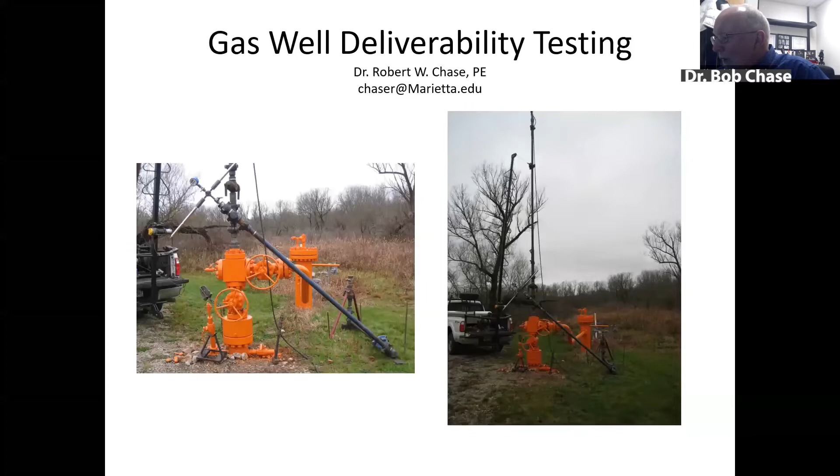Today I'm going to be talking about gas well deliverability testing, but I wanted to start out and demonstrate how much we have more in common with each other than you might imagine.

I just recently had my DNA analyzed by Ancestry.com, and I think you'll all find this interesting. Obviously, I'm very fair-skinned, and Ancestry.com provided a DNA analysis for me. They found that my DNA was primarily Germanic Europe, 18% from England and Northwestern Europe, 7% Irish in my background, 5% Norwegian, so I have a little Viking influence. Interestingly enough, 2% Nigerian, and this next one is what brings us all together. In my background, somewhere, someone along the trade routes back in ancient times must have visited Germanic Europe, and consequently I have 1% Middle East in my background.

So I say to all of you, salam alaikum, and hope you all have a great day and enjoy the presentation. Okay, so let's dispense with humorous information and talk about well testing.

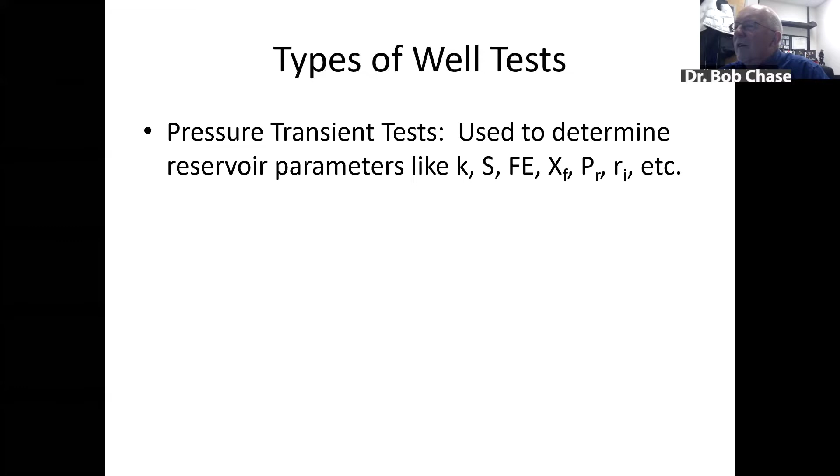You're probably all familiar with pressure transient analysis, and I want to distinguish that from deliverability testing, because pressure transient analysis we use primarily to determine the parameters you see on the screen: permeability, skin factor, flow efficiency, fracture half length, average reservoir pressure, radius of investigation, etc.

Deliverability testing, on the other hand, is what we use to predict the inflow performance of gas wells. Now, you may be more familiar with predicting inflow performance of oil wells. I'm sure many of you have studied about predicting IPRs for oil wells.

Using Vogel's method. And what you should remember from that process is that to predict the inflow performance for an oil well, you really only need one flow test, a stabilized value of flow rate until your bottom hole pressure stabilizes at a PWF. And then you also need your average reservoir pressure. With that basic information, you're able to predict the inflow performance of an oil well.

On the other hand, gas wells are very different. And the biggest difference between working with gas and working with oil, of course, is turbulence. Turbulence is a big factor in the well testing process. And because of turbulence, or non-Darcy flow, we're not able to predict the inflow performance of a gas well using just one flow test. That's what we're going to focus on and learn about today.

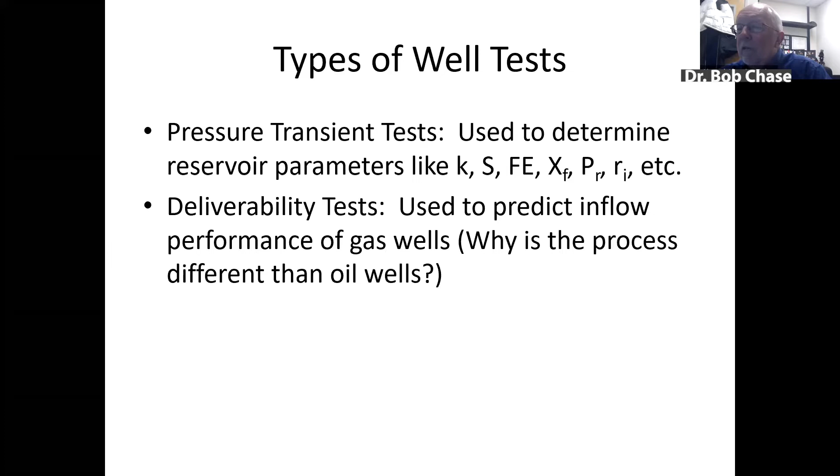So let's talk a little bit about the goals of deliverability testing. The first goal is that we want to be able to predict the inflow performance of our gas well.

A term that we use a lot in the United States and in Canada in particular is absolute open flow, or AOF, of our gas well. The absolute open flow of a gas well is the flow rate that a well will produce against a zero sand face back pressure, in other words, a flowing bottom hole pressure of zero.

So when you relate this type of testing to oil well testing, we're really talking about our maximum gas flow rate, QG max. That would be the equivalent of our maximum oil flow rate in an oil inflow performance test.

In addition to predicting the current inflow performance curve for a gas well, we would also like to be able to predict future IPRs. As you all probably are familiar with the process of nodal analysis, we like to be able to predict the future as well as the current. So future IPR curves are very important, and we'll see how we can do that.

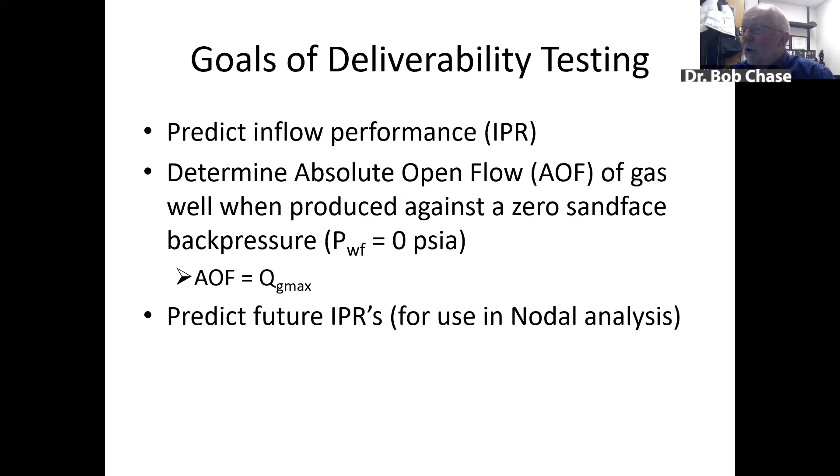Okay, a little bit on the history of deliverability testing. The groundwork for predicting gas well deliverability was done by two researchers with the United States Bureau of Mines. Interestingly, in the early days of the oil industry in the United States, the primary regulatory body that oversaw the oil and gas industry was the United States Bureau of Mines. It later became, I believe, the Department of Interior.

Two researchers, Pierce and Rawlins, did early work in 1929. Then Rawlins and another gentleman named Schellhardt published a monograph in 1936 called Back Pressure Data on Natural Gas Wells. In that publication, they laid the groundwork for what we call 4-point testing, deliverability testing.

Now, the wells that Rawlins and Schellhardt studied and worked on were all very good gas wells and produced at high rates. The rock had good permeability.

In the 1950s, 1955, a gentleman named Cullender published another landmark publication, the Isochronal Performance Method of Determining the Flow Characteristics of Gas Wells. He looked at wells that did not stabilize as quickly as the wells Rawlins and Schellhardt looked at.

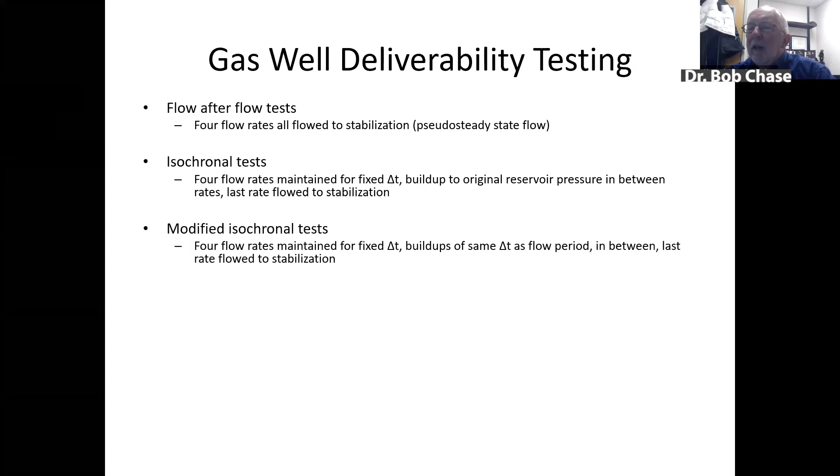That was further modified by Katz, as I mentioned, and he developed the modified isochronal test, where flow rates are maintained for a fixed period of time, delta T, and the buildups in between are maintained for that same exact delta T as the flow period. Then finally, the last rate is flowed to stabilization. We'll look at some examples of these 3 different methods in just a few minutes here.

Now, again, I go back and contrast this to oil wells, where we can characterize inflow performance with just one flow test.

Some folks have tried to characterize gas well deliverability with just single flow tests, but you have to make some serious assumptions, and single point tests really are not the best way to accurately determine your well's inflow performance.

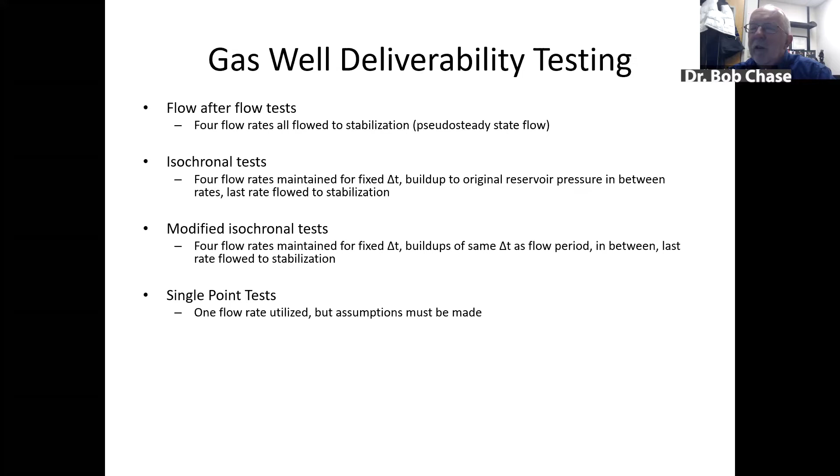All right, so let's talk about the first of the 3 primary methods for determining gas well deliverability.

Monograph 7, as I mentioned, was developed by Rawlins and Schellhardt in 1936. They came up with an empirical equation that says Q is equal to a constant C, which we call the performance flow coefficient, times the quantity PR bar squared, that's your average reservoir pressure, minus the flowing bottom hole pressure squared, and that PWF is the flowing bottom hole pressure at stabilization or pseudo steady state flow value of PWF, raised to an exponent n.

Interestingly enough, n must be in the range between 0.5 and 1. If your exponent n calculates to be 1, it means you have completely laminar flow. Any of you who have studied natural gas engineering know that rarely do we have laminar flow in gas wells. If we have completely turbulent flow, then n would equal 0.5. If n is greater than 1 or less than 0.5, then you really need to consider retesting your well, because something was probably wrong in the process you did when you tested the well.

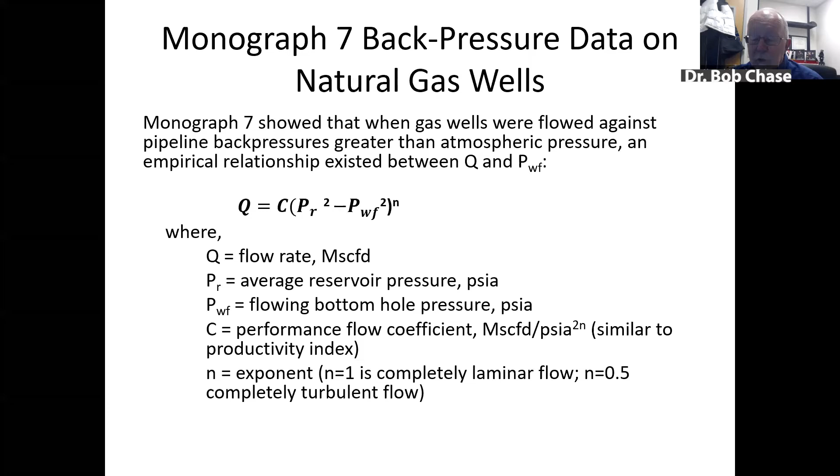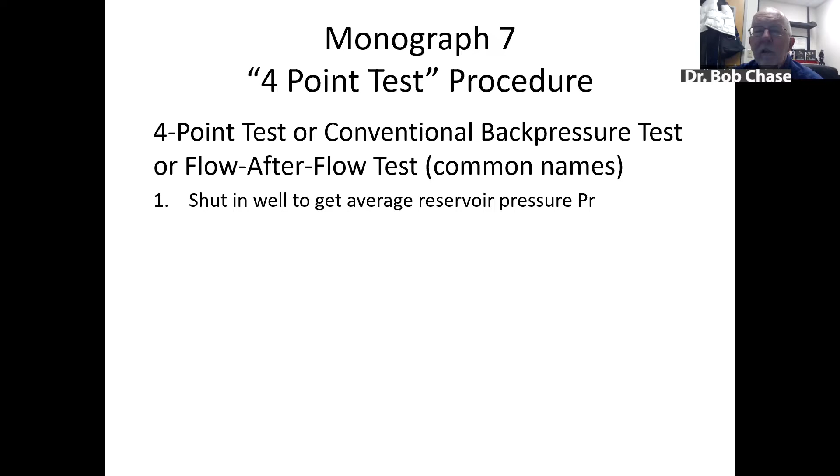Okay, so Monograph 7 outlined what we call the 4-point test procedure for determining gas well deliverability or inflow performance. The 4-point test, or flow after flow test, works as follows: we start with our well shut in, so we can obtain the bottom hole average reservoir pressure PR bar. I will mention that you really must use bottom hole pressures when doing this type of test. Using surface pressures, casing head, or tubing head pressures is not recommended, because if you replace the tubing in your well for any reason with a different diameter, it will not reflect bottom hole conditions. So you really do need the bottom hole pressure conditions.

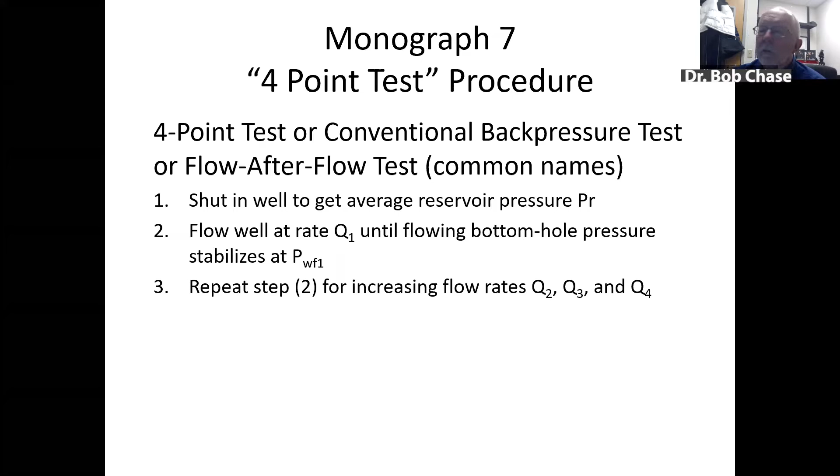So after we've shut in our well and recorded our average reservoir pressure PR bar, we flow our well at a rate Q1 and maintain that flow rate until the bottom hole pressure stabilizes at PWF1. The 1 signifies just the first flow rate. We repeat this for increasing flow rates Q2, Q3, and Q4. In this process, as you can see on this graph, the top portion shows the 4 flow rates maintained to stabilization, and the bottom graph shows how bottom hole pressure declined as a function of time, stabilizing at PWF1 for Q1, and so on through PWF4.

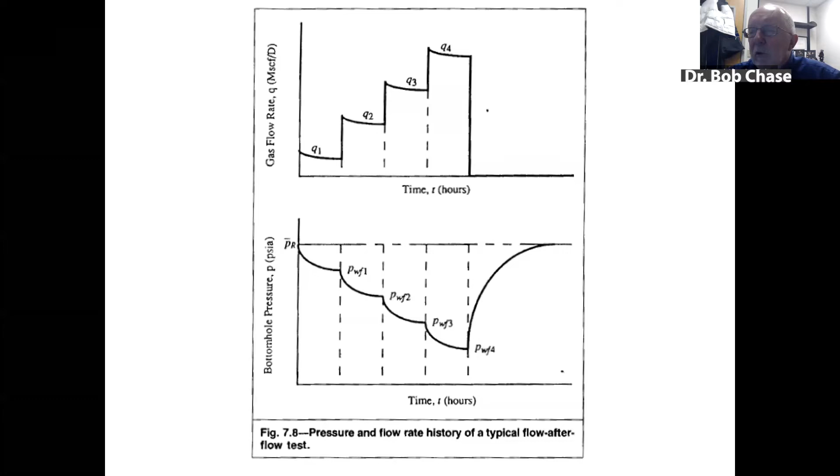Very often at the end of a test, we allow the well to build back up to initial reservoir pressure PR bar. Now this data, the flow rates, we always use the endpoint of those flow graphs. Where you see Q1, it has declined a little bit with time and then stabilized, so we use the stabilized Q1, not an average during that flow period. We use the PWF 1s, 2s, 3s, and 4s to make a plot like we see on this next graph.

Normally we plot our data on log paper. On the y-axis we have the log of delta P squared, where that delta P squared is your PR bar squared minus PWF squared, as shown in the equation on the right-hand side of this plot. We plot that versus flow rate on the x-axis, also on a log scale. Here we have 4 data points, and we're able to draw a straight line through that graph, and the slope of that line is equal to 1 over n. If you look at the equation on the right, that exponent n appears, and therefore n is equal to 1 over the slope of that line.

So you need to be able to measure the slope on log paper, and I'm sure you've all done that at some point in your education. When calculating your slope, if you choose 2 points exactly 1 cycle apart on your y-axis, come into your straight line and read off the flow rates associated with those 2 points exactly 1 log cycle apart, you're able to determine your n value, equal to the log of Q2, your second flow rate, over Q1, as you see on the right-hand side.

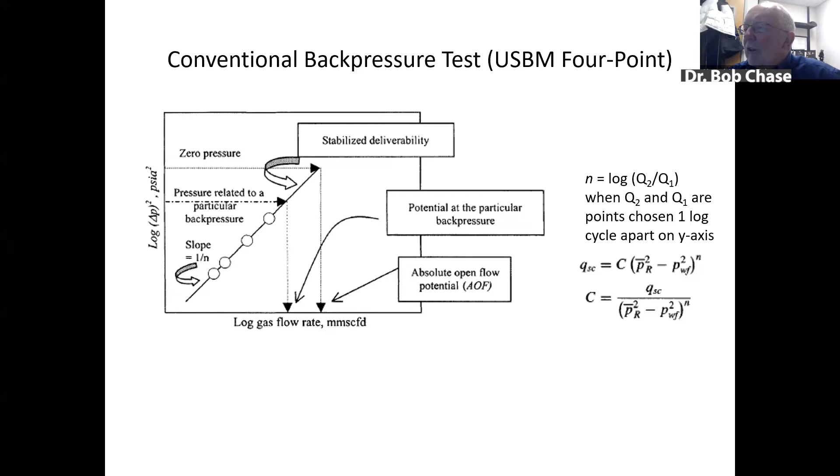So let's talk a little bit, we'll go back a second. We want to talk about the mathematical justification for being able to plot this data as a straight line on log-log paper, reflecting the equation that we see on the right-hand side here, the equation of stabilized deliverability. Q is equal to C times your delta P squared to the nth power.

In their publication in 1937, Rawlins and Schellhardt proposed the equation that we just talked about. If we take the log of both sides of the equation, we have the log of Q is equal to the log of C plus N times the log of delta P squared. That's just a matter of taking the log of both sides and using your mathematics to do that.

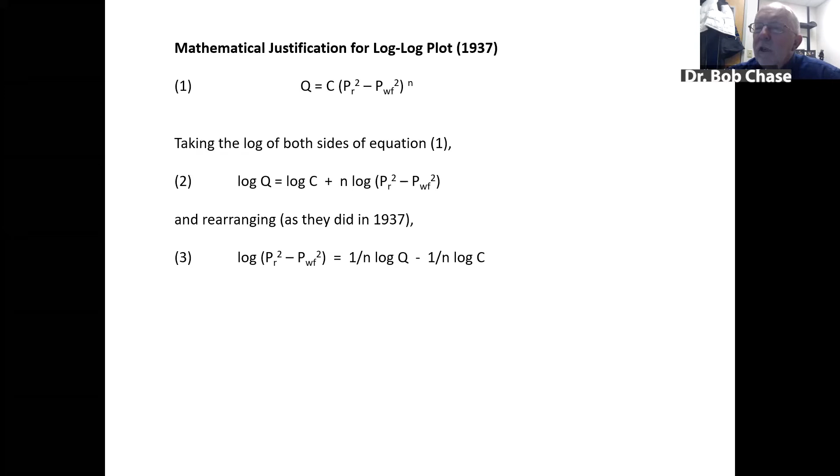In 1937, Rawlins and Schellhardt rearranged that equation, and we see you have the log of the delta P squared is equal to 1 over N log Q minus 1 over N times the log of C. 1 over N log C is just a constant, but you can see from this equation that plotting PR bar squared minus PWF squared as your Y value on a log scale versus flow rate Q on the x-axis, you have the equation of a straight line where 1 over N is the slope of that straight line, just like we saw on that last slide.

Okay, so here we just repeat the same thing. The equation says plot delta P squared versus Q on log-log paper. You get a slope equal to 1 over N, and then you find C by rearranging the equation as we showed on the last slide.

Now, we've come a long way since 1937. There were no computers in 1937, there were slide rules, and that's how Rawlins and Schellhardt did all their work. In fact, that's how I did all my work as an undergraduate at Penn State back when I started school in the 1960s. You all have computers, we can do most of this stuff on our phones these days. But I just want to point out that today we don't need to stick to the old ways.

If we look at equation 2 up above, it says if you plot flow rate on your y-axis versus PR bar squared minus PWF squared on your x-axis, you have a slope of N directly, and you're going to be able to get your stabilized performance coefficient off the graph as well. And if you do this in Excel, I'll show a little example here in a minute, and you use the power law fitting function in Excel, you get this information directly.

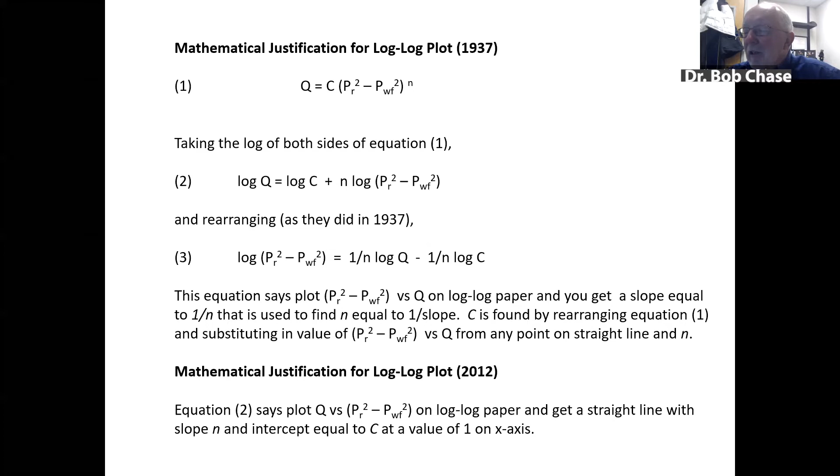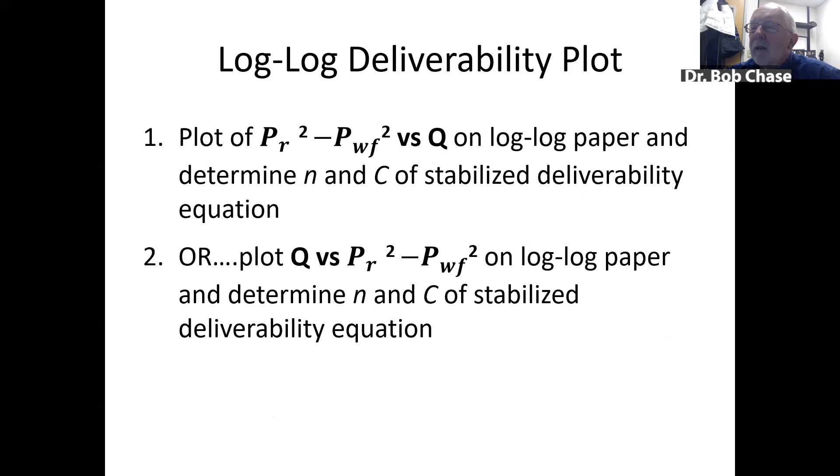So we'll talk about the conventional way to do it, the old way, what people have been using for the last 70, 80 years, and what we can now do with a simple computer program. Okay, so here's the justification. We're going to make log-log deliverability plots. The old way is to plot delta P squared on the y-axis and Q on the x-axis. The better way to do it is plot Q on the y-axis, delta P squared on the x-axis.

Here's a little example that is one of my favorites I used to use when I taught petroleum engineering and natural gas engineering, which I did for 39 years. We have a well that has an average reservoir pressure, bottom hole pressure, of 201 psi. Now, is that a good well or a bad well? You have to ask yourself, I'd always ask my students that. And the answer was overwhelmingly, why would anybody produce a well that has just a bottom hole pressure of 200 pounds?

Well, this well was tested using conventional 4-point test theories, and it was flowed at 4 different flow rates, and the bottom hole pressure stabilized at the 4 values of PWF that you see there, 196 psia through 190 psia.

So I ask you what your initial reactions to this data are. Is this a good well or a bad well? Most people would say this is a bad well. It only has 201 pounds pressure, and when you're flowing your well, you're not getting much of a drawdown.

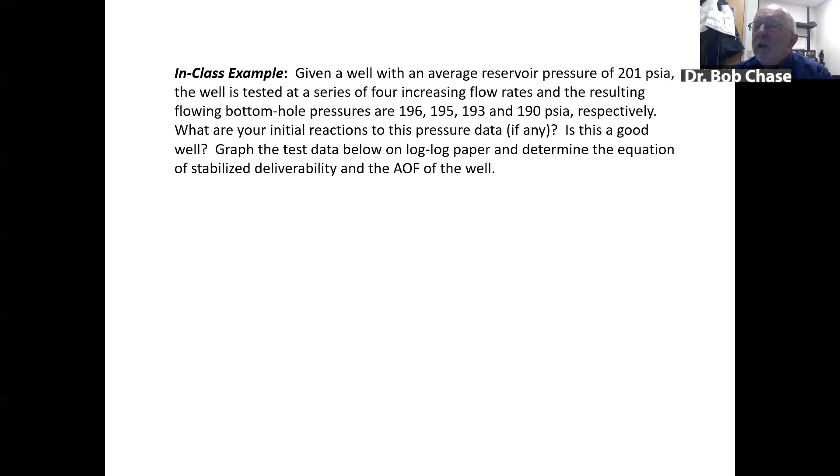But we need to look at the rest of the data and see what the flow rates were. In this case, the bottom hole pressure was 201 pounds, and the well stabilized flowing at a rate of 2.7 million cubic feet of gas a day, or 2,730 MCF per day, stabilized at 196 psi. It stabilized very rapidly because this is a reef structure up in Canada that has very high permeability and very high deliverability. So even though the bottom hole pressure is low, this well turns out to be a very good well. If you own this well, if you were a capitalist living in Canada instead of working in the Middle East, you'd be very happy to have this well or the royalties from it, because it's a very good producing well.

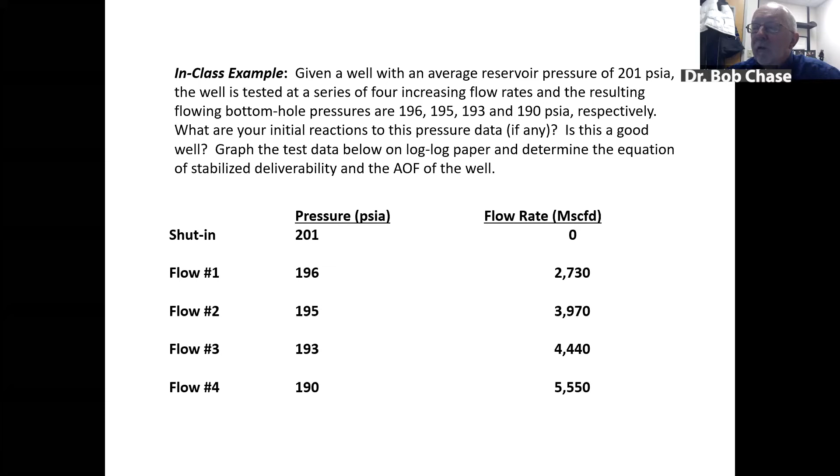So we want to analyze this data. We take our average reservoir pressure, 201 squared minus 196 psi squared. That gives us a delta P squared value. We plot that versus the flow rate, and we get a graph that looks like this.

From this plot, we want to determine our N and C values. But before we do that, I just want to mention why we do a 4-point test and not a 1-point test. Obviously, if you have a 1-point test, you have no idea where to put a straight line through 1 point, it could go in any direction. If you look at any 2 points on this graph and just float a line through them, you could get one straight line much lower than the one I show in the picture. If I use the middle 2 points, I'd get a different straight line. If I use the second point from the bottom and the top point, I'd get a different straight line.

If I use 3 points, I'd end up having to use the least squares method to fit a straight line through the data. By having 4 points, we can see that 3 points are pretty good points and 1 point is an outlier. So we could discard that point from our data and use what appear to be 3 good points to get our straight line.

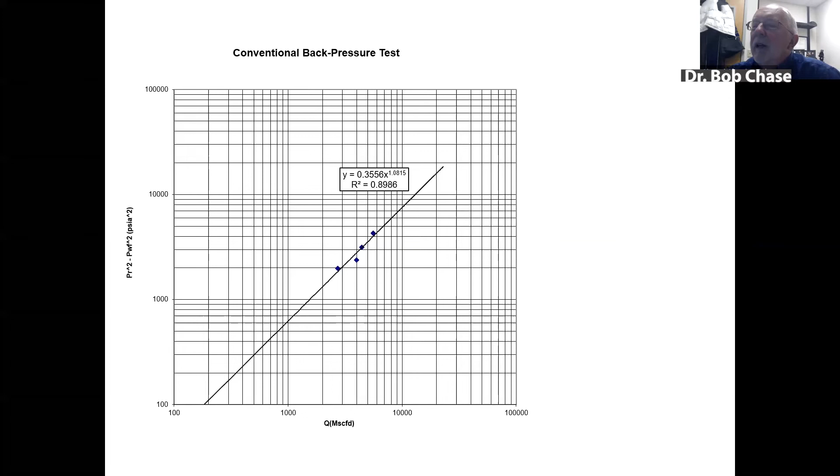Analyzing this data, this is the data that was used to prepare that graph. The results at the bottom show that our graph had a slope of 1.0815, which you get as the exponent for your x value in this particular case. 1 over that slope gives us our n value of 0.92. And if you remember, n has to be between 0.5 and 1. The closer it is to 1, the more laminar the flow is. In this case, the reef structure had high permeability and flow was more laminar than turbulent.

We calculate our C value, 2.42 MSCF per day to PSIA squared. And we find our maximum flow rate against the 0 sand face back pressure from our deliverability equation of 44,000 MCF per day, or 44 million cubic feet of gas a day. So your initial reaction, was this a bad well? You probably thought yes, but the well's capable of producing at a very high rate, 44 million cubic feet of gas a day, when it's wide open, with a theoretical bottom hole pressure of 0.

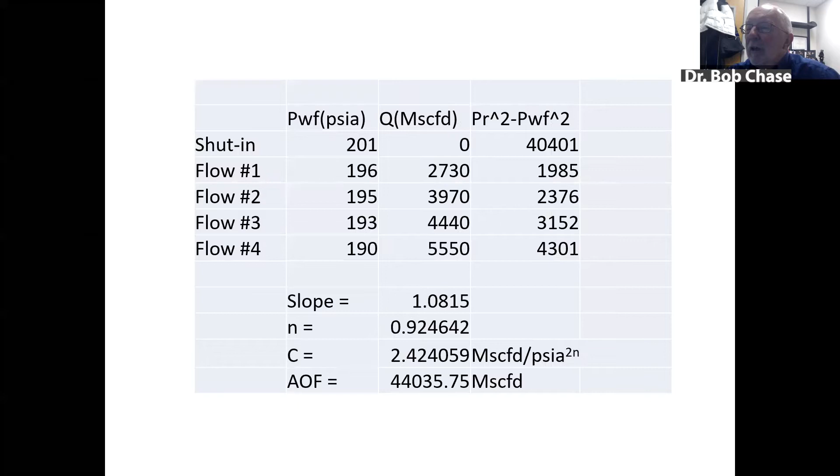Now, same data plotted in modern fashion, 2012 fashion, Q as your Y value and delta P squared as your X value. Using the power law fitting formula in Excel, you get an exponent for x of 0.9279 and a C value of 2.4165. Compare that back here, you see N is 0.9246 and C is 2.42. So plotting it in the unconventional way, we get the results we want directly for C and N using Excel.

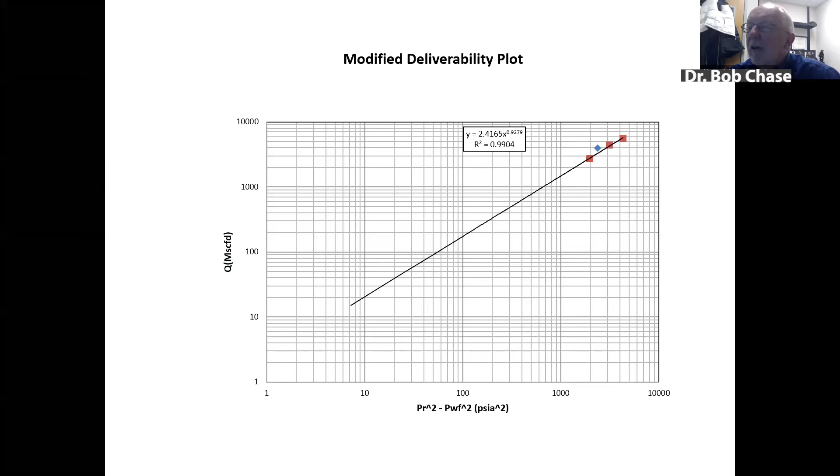Okay, now let's talk a little bit about this thing called time to stabilization, because anytime you're doing a 4-point test, all 4 of your flow rates have to be maintained to stabilization. The time to stabilization equation comes from the solution of the diffusivity equation using the exponential integral function.

This is the Canadian version of time to stabilization, or pseudo steady state flow. It says time to stabilization equals 1,000 times porosity, viscosity, your external drainage radius squared, divided by permeability, and your well's average reservoir pressure.

The actual equation is 948 phi mu RE squared over K PR, but the Canadians like to round things off a little bit, and they use 1,000, and I took this from a Canadian well testing monograph. In John Lee's book, which a lot of you probably use in your classes, 948 would be the exact constant to use.

Okay, so our goal is to find the equation of stabilized deliverability using the method that we just talked about. And the time to stabilization is very important. If your well stabilizes quickly, and you can estimate that time using this equation, then there's no problem.

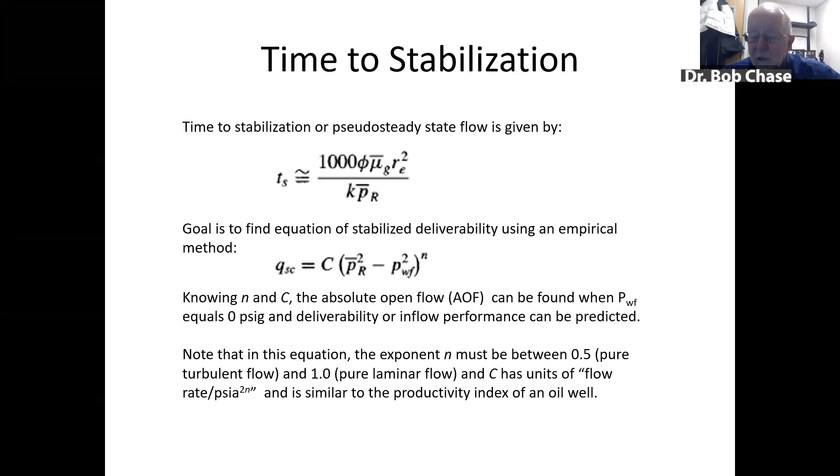But if you're dealing with wells like I deal with here in the United States, we're producing a lot of natural gas from shale, and the permeability of shale might be 1,000th of a millidarcy. Time to stabilization could be very long. Let's look at an example of that.

We want to calculate time to stabilization for a reservoir that has an average pressure of 3,000 pounds, gas viscosity of 0.02 centipoise. We have a radius of drainage for this well of 1,000 feet. It's a 200-foot thick formation. Porosity is 10%. And we're going to look at 2 cases, a permeability of 100 millidarcies and a permeability of a 1,000th of a millidarcy.

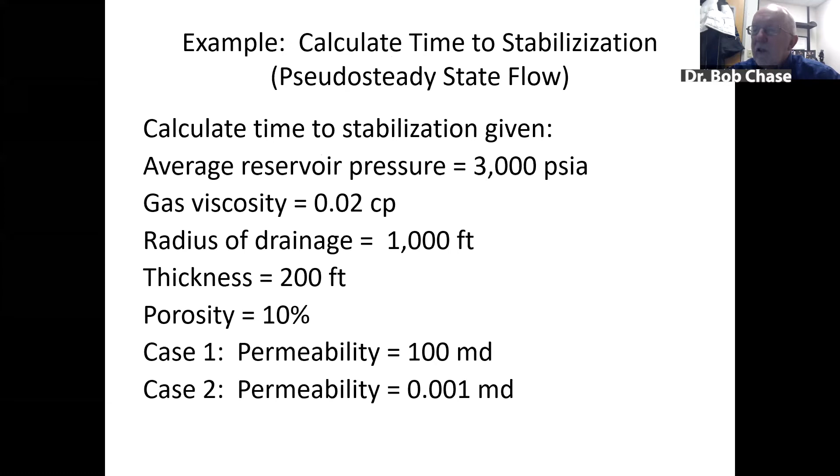When we do these calculations, we find for the well that has a 100 millidarcy permeability, K being 100 in the denominator of this equation, it only takes about 7 hours for this well to stabilize at a given flow rate.

If we use a permeability of 1,000th of a millidarcy, we see that time to stabilization is 666,666, almost 700,000 hours. Now, if you're working in Ohio, where I live, and your boss says, go out and do a stabilized well test on a shale well...

And make sure it's stabilized, I say, I'll be back in about 100 years, because it's going to take me 700,000 hours to achieve stabilization. So that type of test, a 4-point test, is certainly not practical on a shale well where that time to stabilization is so large.

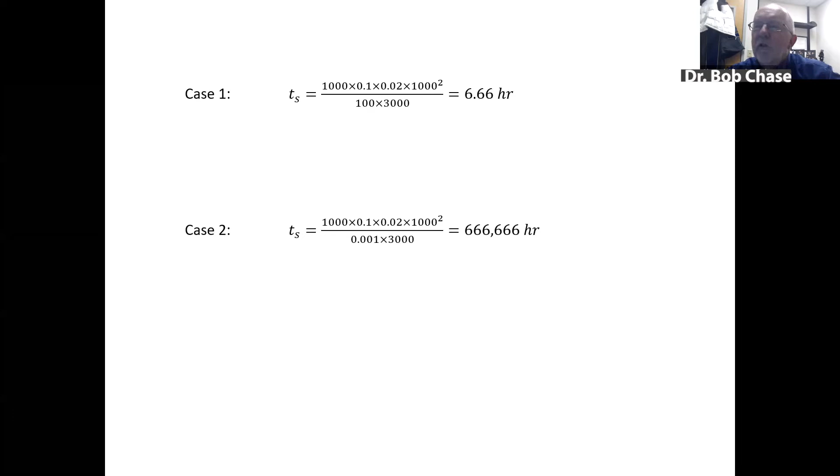So when you're designing a test, and we're not going to talk about well test design today, one of the first things you do is you estimate time to stabilization, so you can determine whether you should run a conventional test or the test we'll talk about next, the isochronal test.

Now, in this particular method, this is better suited for testing a well that has a lower permeability and stabilization times are greater than maybe 20 hours. You don't want to have to stay out there longer than about 20 hours to get stabilization.

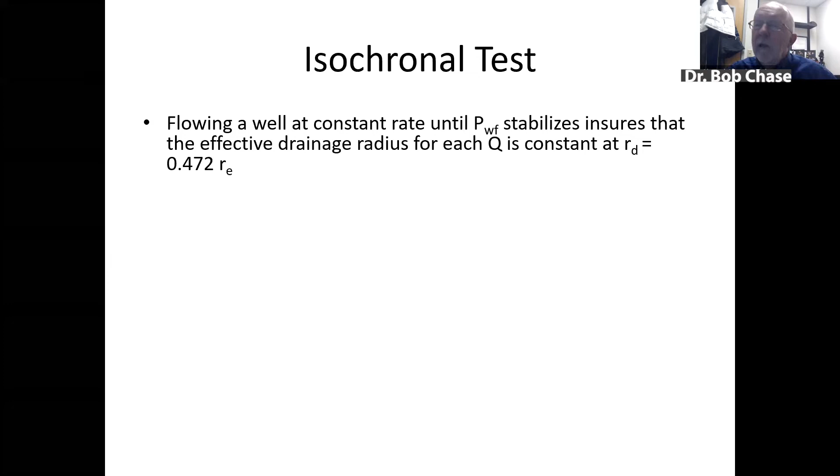So in this case, we flow our well at a constant rate until our flowing bottom hole pressure stabilizes. We do this to ensure that the effective drainage radius is equal to 0.472 RE. Basically, if we want to achieve stabilized flow or pseudo steady state flow in a reservoir, we have to maintain it until that particular radius of drainage is reached, and our pressure transient we've created in the reservoir has reached the outer boundary of our reservoir, R sub E.

In 1955, Cullender talked about this, and he said that radius of drainage was a function of dimensionless time and not flow rate.

The dimensionless time equation is related to the time to stabilization equation shown earlier. You might wonder whether gas wells stabilize slower at a flow rate of 1,000,000 cubic feet a day versus 10 million cubic feet a day. But time to stabilization, as we saw in the equation a few slides ago, is not a function of flow rate. Porosity, viscosity, external drainage radius, permeability, average reservoir pressure, and total compressibility are the terms that affect time to stabilization, not flow rate. So you can choose any rates in your testing and still achieve stabilization at approximately the same time.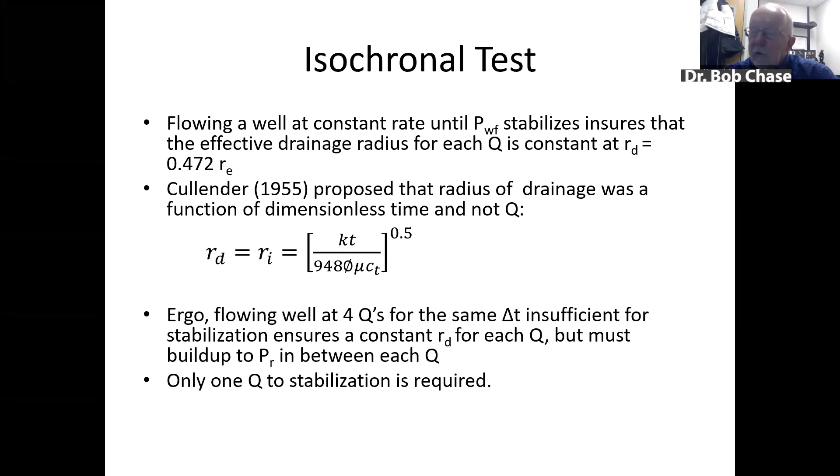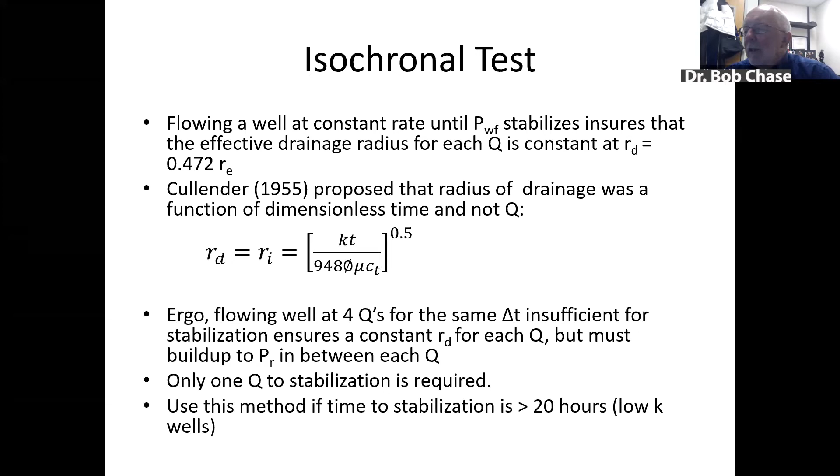He also said that in between those flow periods, you should shut your well in and build back up to your average reservoir pressure, PR bar. And your last flow rate has to be one where your bottom hole pressure stabilizes, to determine your true deliverability curve, the equation of stabilized deliverability. I recommend that if your time to stabilization is greater than 20 hours, this isochronal method is an acceptable method to use.

So what does that look like graphically? You flow your well at a rate Q1, your bottom hole pressure falls to a value of PWF1, but it has not stabilized. After a fixed period of time, say 10 hours, you shut that well in and build it back up to your initial reservoir pressure PR bar. You can see the increasing pressure back up to that pressure.

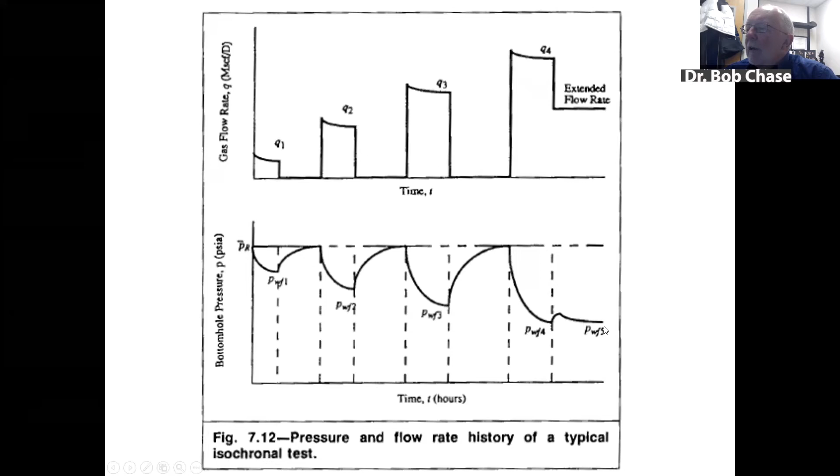Then we flow at a rate Q2. It doesn't stabilize, pressure decreases to PWF2, and we shut in again. You repeat that 3 times, building back up to average reservoir pressure each time. Finally, for our 4th flow rate, we flow our extended rate until it truly stabilizes at some stabilized flow value, and we record our flowing bottom hole pressure at that stabilized rate. We call that PWF5.

Because the radius of drainage is stabilized at those intervals, here we see a plot similar to the deliverability plot we saw for a 4-point test. At a time of 1 hour, we record pressures during our test and get a straight line reflecting our well's deliverability at that time - this is a transient deliverability curve. At T2, 2 hours, we record flowing bottom hole pressures and again get a straight line. We do it again at 3 hours, and could do it at 10 or 20 hours. We would find in every instance these lines have the same slope.

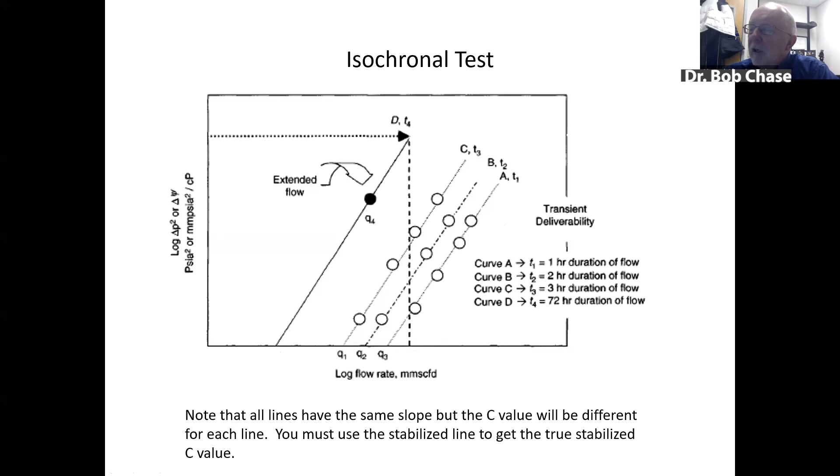Cullender saw this and realized that by doing this, he only needed to flow his well at one stabilized rate, Q4, which he did for 72 hours on this well. He said the straight line through this point has to be parallel to the lines through the other points - again, this is the plot of delta P squared versus flow rate. So all the lines have the same slope, but our C value will be different for each line. Remember, the equation of stabilized deliverability is Q equals C times delta P squared to the nth power, where N equals 1 over the slope. So if the slopes are all the same, N never changes, but C changes for each of these values. Our curves migrate from right to left, meaning our C value decreases as we approach pseudo-steady state or stabilized conditions. What we want is the stabilized C value.

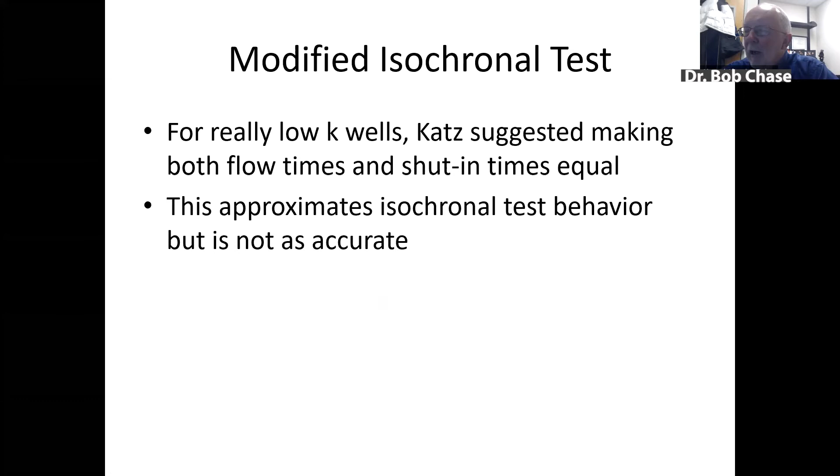Moving on to the third method, the modified isochronal test developed by Katz. Katz was interested in predicting deliverability for low permeability wells, and he proposed a shortcut: approximate isochronal test behavior. It's not as accurate, but if you make shut-in times equal to flow times and still have one point to stabilization, you get a good estimate of well deliverability. So we see a similar plot as before.

Four flow rates flowed for equal periods of time, a delta T, say 10 hours, with a shut-in period of 10 hours in between. In the last case, we extend the flow rate until stabilization occurs and get a stabilized Q value and a flowing bottom hole pressure at stabilized condition, which is our PWF5 value.

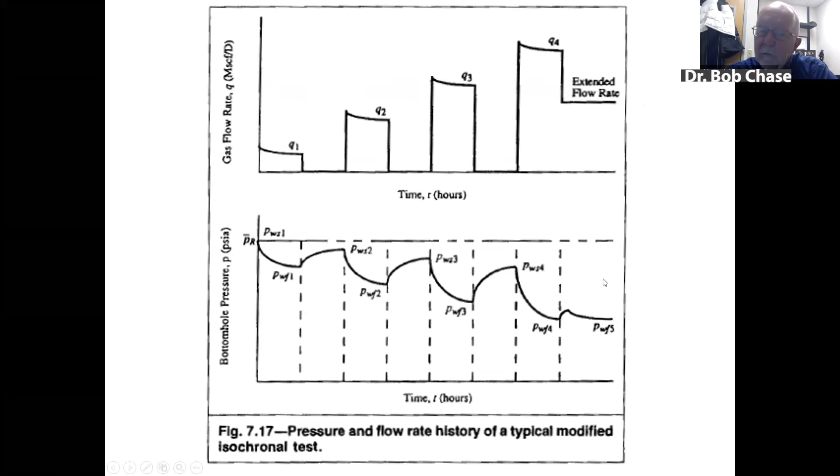He did the same thing that Cullender did. If he did a 10-hour transient time period test, he got 4 points that fell on a straight line, allowing him to calculate his slope. He shifted a line of the same slope through a stabilized point, giving him the stabilized curve, and he can then calculate the equation of stabilized deliverability.

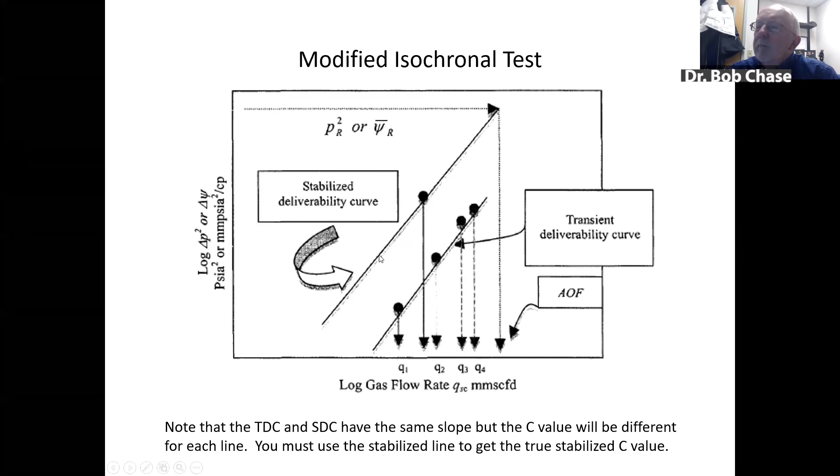Generating IPR curves is the ultimate goal. To do that, we need several pieces of information. If you know your well's current average reservoir pressure and you've tested your well to find your N and C values, you assume values of PWF between 0 psi and your average reservoir pressure and calculate corresponding values of Q versus PWF. This lets you calculate and predict your inflow performance curve, a plot of PWF versus Q, similar to the curve generated using Vogel's method for an oil well.

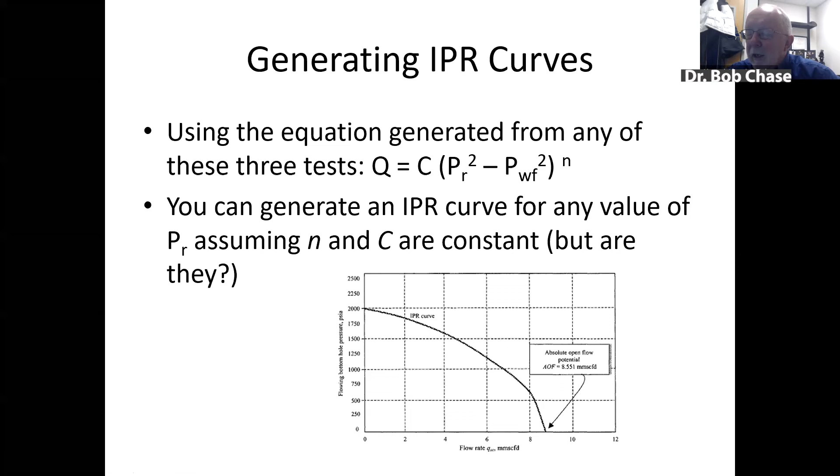The beauty of this method is that if you want to predict future well deliverability, all you have to do is assume future values for your average reservoir pressure. Let's say your average reservoir pressure is 1,500 pounds in the future. If you assume your C and N values don't change, you put your new average reservoir pressure of 1,500 pounds in, and you can generate a new IPR curve that will be pretty much parallel to the one in this graph. You can generate a whole series of IPR curves down to your final abandonment pressure for PR.

I'm throwing a lot at you, I realize, and I'm going to throw some more at you, because there are multiple ways to analyze well test deliverability data for gas wells. I want to point out another effective method, one that you'll find has different names.

In Canada, they talk about the Forchheimer equation. In a well testing book by some folks from Tulsa, whose name escapes me right now, they talk about the Jones-Blount-Glaze method of analyzing deliverability test data. The Canadians also talk about the laminar inertial turbulent flow equation. And in John Lee's book, he refers to it as Houpeurt's equation.

That equation is the first one we see at the top of this page: average reservoir pressure squared minus PWF squared equals a term A prime Q plus B prime Q squared, where the A prime term reflects the laminar component of the equation, and the B prime term has a capital D in it.

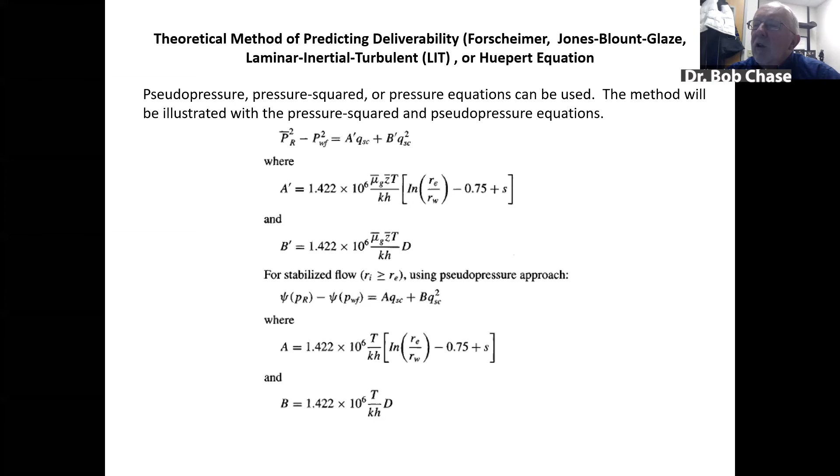Well, all of the folks I mentioned, Jones, Blount, Glaze in particular, Houpeurt, said if you take the equation A at the top of the page there, PR bar squared equal to A plus B in those terms, if you divide both sides of the equation by Q, you end up with the expression PR bar squared minus PWF squared over Q is equal to A plus BQ. Obviously, this is the equation of a straight line that says plot PR bar squared minus PWF squared over Q as your Y value and Q at standard conditions as your X value.

And if you do that, you'll get the equation of a straight line where each of the 4 points that you see on this straight line are points from our deliverability test, the way we obtained our deliverability data before from an actual field test. The slope of the line B in this particular graph we see indicated, and the intercept at a value of Q equal to 0 is shown as 1.1192.

We calculate A and B, and from that, we now have the equation, the values of A and B that we use in that equation. Knowing our average reservoir pressure, we can assume values of PWF, calculate values of Q, and predict a well's inflow performance.

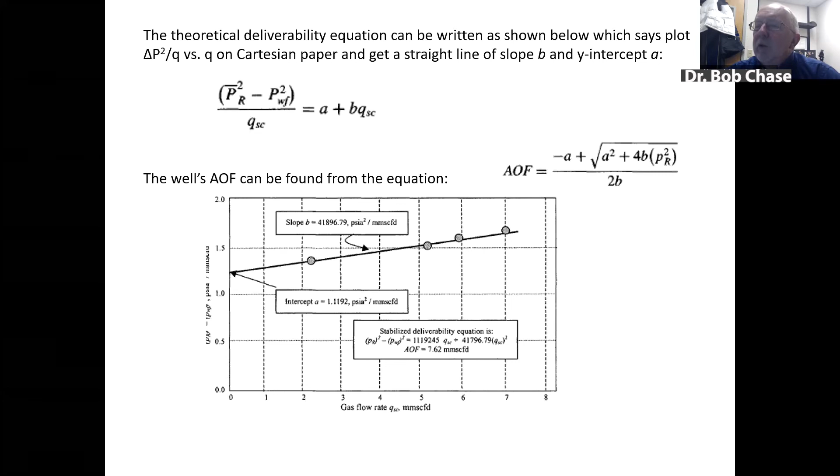Okay, so what Jones, Blount, Glaze said is you prepare an LIT plot, and an LIT plot is simply a plot that looks like this: Delta P squared over Q equal to A plus BQ. You prepare that plot, you determine your value of A, B being the slope of the equation, A being an intercept of the straight line.

If you're using isochronal test data or modified isochronal test data, then you have to do something similar to what we saw on the previous plots for those procedures. You will have a transient straight line that you'll use to calculate your B value, and you'll have one point on a stabilized line, so you'll put a parallel line through that value of your pseudo steady state value, and you're able to get the stabilized A value, the A at pseudo steady state conditions.

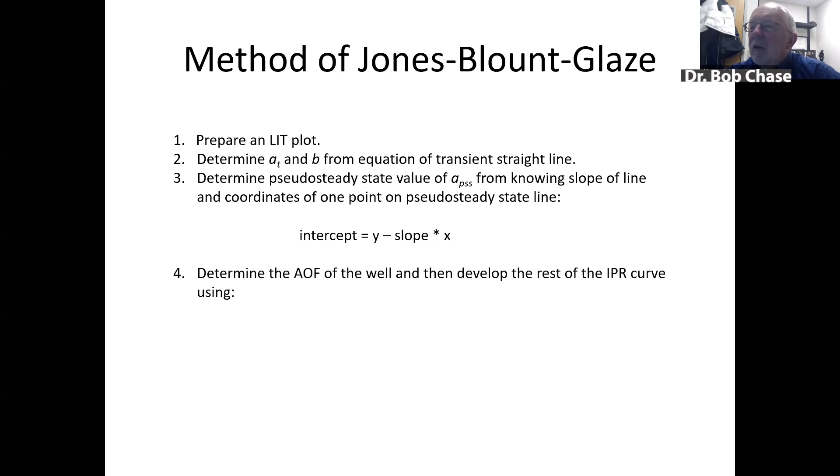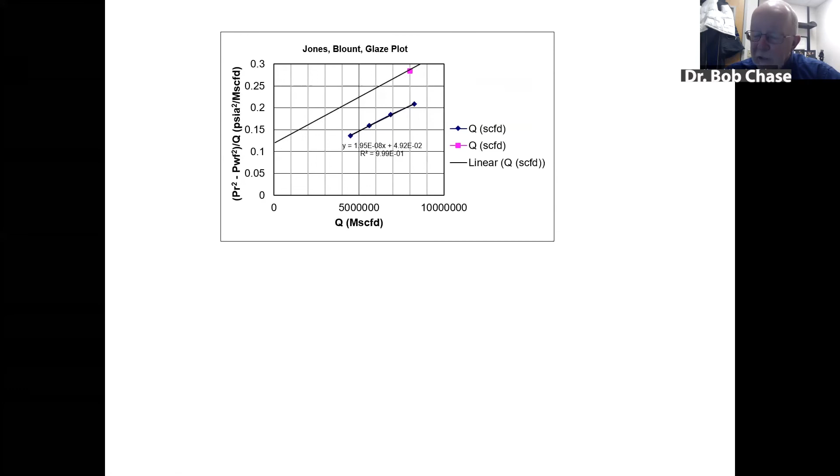Okay, an example of that is shown here. We have pressure squared over Q on the y-axis versus Q on the x-axis. We have 4 points taken from transient data that we get, say a 10-hour flow period, and one point that has been stabilized. We get our slope from the straight line, and our intercept we get from the graph here. That would give us our A at pseudo steady state conditions, and we can use that to predict our deliverability.

So down below here, we see the A from regression analysis, 4.92 times 10 to the minus 2 for our transient A and our slope B. Down below, we're able to find our pseudo steady state value of A. And from the data, we can calculate our stabilized deliverability.

And that's Ahmed's phone ringing in the background, so you'll have to excuse us for that.

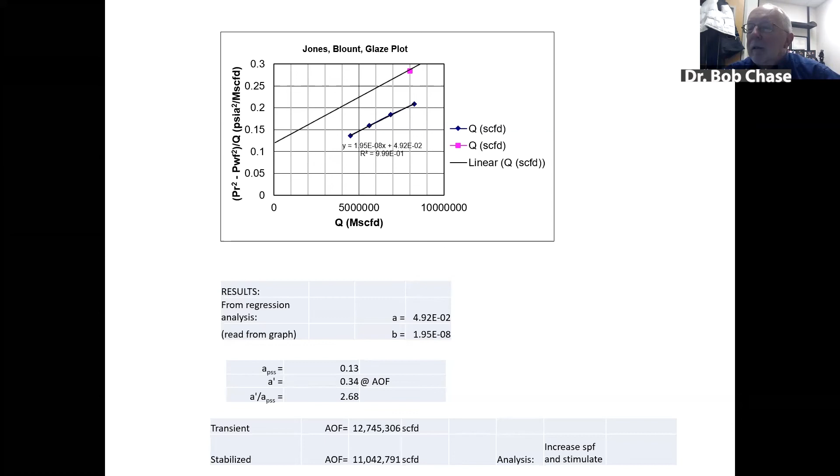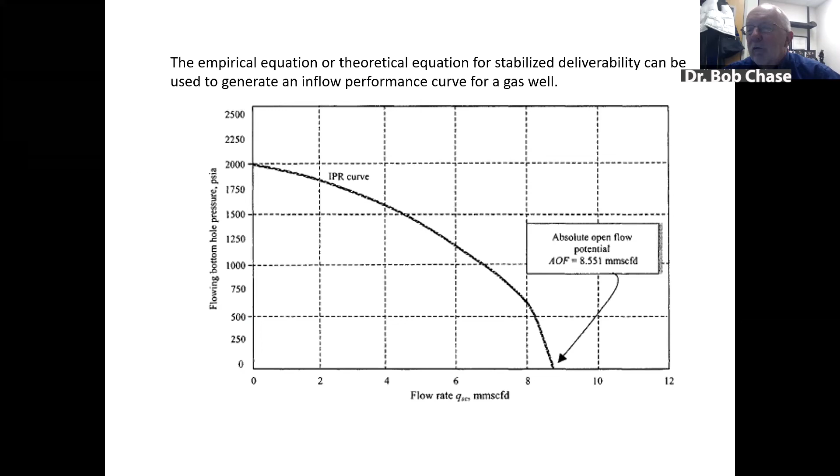Again, here's another view of a typical IPR curve that we would get by knowing A and B and using our current average reservoir pressure here, it was 2,000 pounds. We can assume values of PWF and calculate flow rate values and generate the IPR curve here. And we can do the same for future IPR curves.

Now, what if you can't flow your well to stabilization at all? What if you're dealing with a shale well? The shale well is a particularly tough issue to deal with. I'm not going to say a lot about this, but I want you to be aware of two SPE papers that are excellent.

These papers are excellent with regard to predicting gas well deliverability when you have no stabilized data. Fred Poettmann from the Colorado School of Mines published a paper in 1986, based on a method of Brar and Aziz, who published a paper on using non-stabilized data to predict gas well deliverability. Both papers are excellent, and they use the same information and procedures we were just using, the LIT equation or Houpeurt equation.

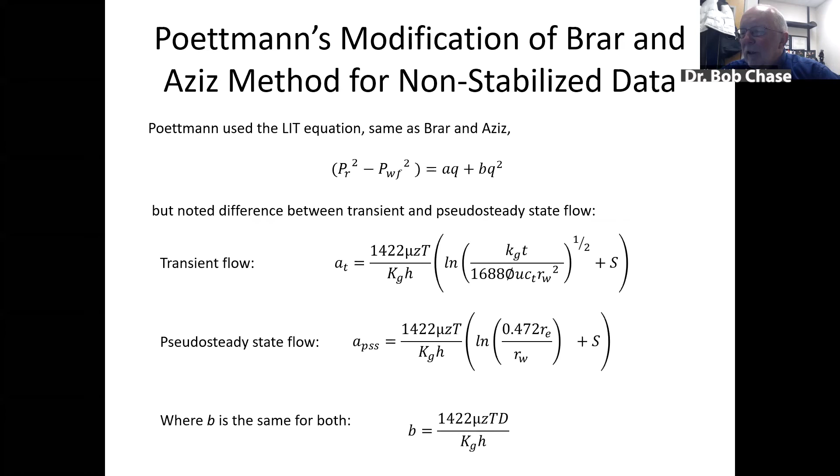Poettmann showed that the value of A for transient flow is different than the value of A for pseudo steady state flow, and he equated them. Whether you're dealing with transient flow or pseudo steady state flow, the B value is a constant given by that equation. Poettmann said he equated the values of transient and pseudo steady state flow to come up with the term he called pseudo stabilization time.

This is very similar to the time to stabilization equation we had earlier, where the constant was 948 phi mu c t, re squared over k. Very similar term, as I note here.

Poettmann's procedure says run an isochronal test or a modified isochronal test, recording your flowing bottom hole pressure data versus flow rates at a series of times, say 1, 3, 5, 7 hours. Make plots on your regular graph paper, delta P squared over Q versus Q at each of those times. Solve for transient values of A and B for each of the lines that you get on your graph.

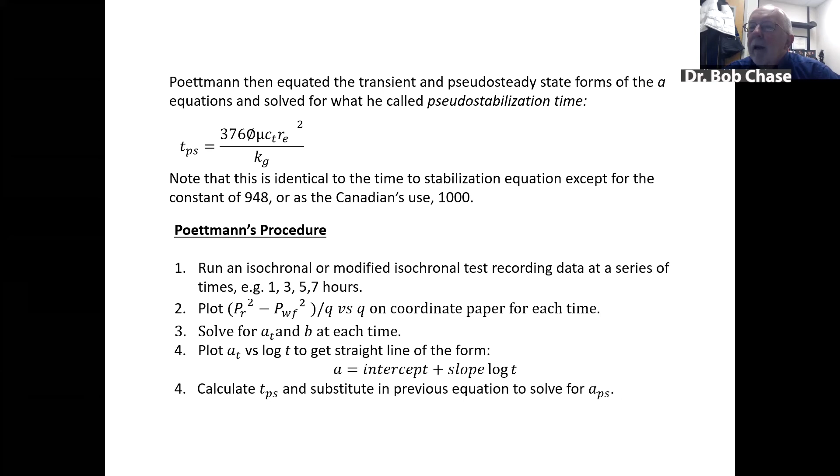Then plot your transient value of A versus log of time, and you get a straight line of this form. If you substitute your value of pseudo stabilization time into that equation for T, knowing the slope of the line and the intercept, you're able to calculate your value for A at pseudo-stabilized flow, which is the value you want for predicting your well's inflow performance.

You can use the average value of B for your lines at 1, 3, 5, and 7 hours. From that average value of B and the A-PS that you get in step 4, you have the equation for stabilized deliverability that you can solve with the quadratic equation.

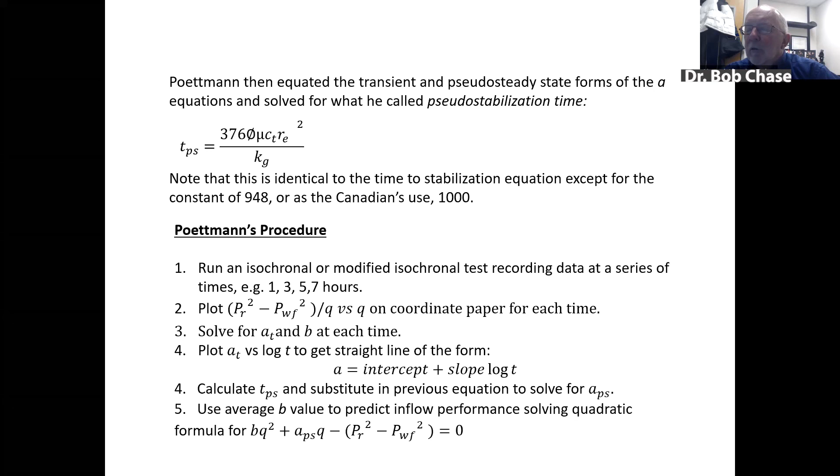Now, I realize I've thrown a lot at you here in the last 5 minutes, and I did that on purpose because I want you to read. If you are doing any work on gas well testing, I think the paper by Brar and Aziz is an essential paper, and Poettmann's method for predicting gas well deliverability from unstabilized data, which is a modification of Brar and Aziz's paper, is an excellent one. I would hope that if you're dealing with those kinds of wells, lower permeability wells, you'll consider reading those papers and applying that methodology.

I've done a lot of research on single point testing, and came up with a method along with one of my favorite Middle Eastern students, Hassan Al-Kandari, who went on to get his PhD at Colorado School of Mines. Hassan and I developed a method of analyzing data using a single point test. You can find that paper in the SPE library if you're interested in reading about it. The method has been built into several big nodal analysis programs that some of you may use, so if you just have one point, you're able to do that analysis. But there's always danger when using just one point to get a deliverability curve and predict an inflow performance curve.